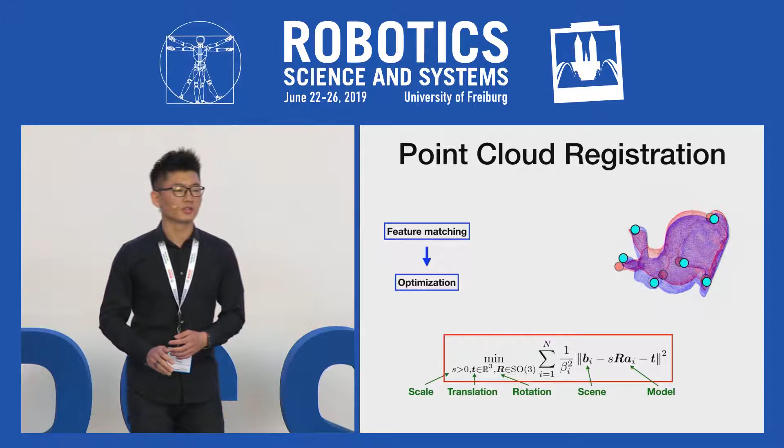However, in practice, many of the feature correspondences are actually wrong. Therefore, it is popular to apply RANSAC and M-estimation to deal with outliers. But as shown by these two videos, both RANSAC and M-estimation can easily get stuck in local minima in the regime of high noise and high outlier ratios.

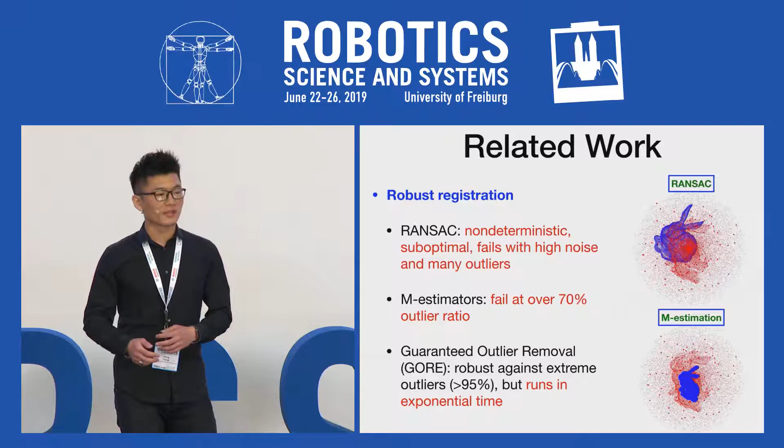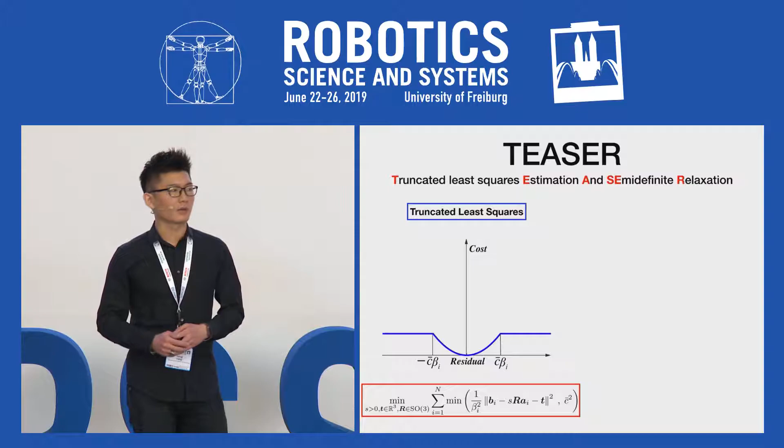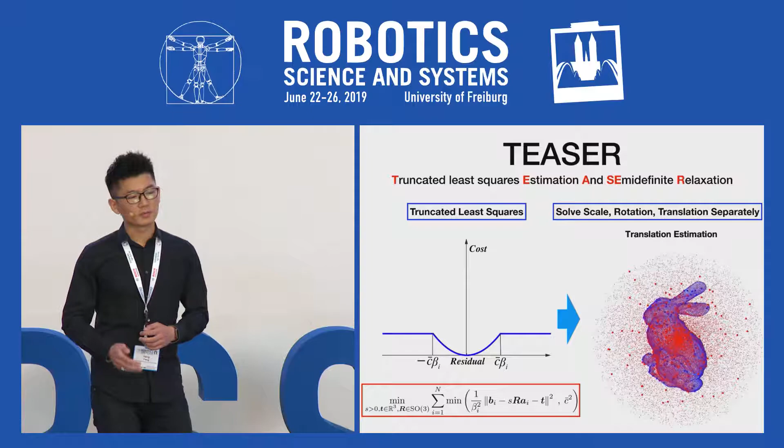Our method, TEASER, uses a truncated least squares cost function so that the outliers have no effect on the optimization. Solving this optimization, however, is extremely hard. Therefore, our key contribution is to decouple the estimation of scale, rotation, and translation, and to develop polynomial time algorithms for each problem. In order to decouple the estimation, we propose to build invariant measurements.

The first insight is that the relative distance between any two points is invariant to translation and rotation, and only depends on the scale. The second insight is that the relative positions are actually invariant to translation.

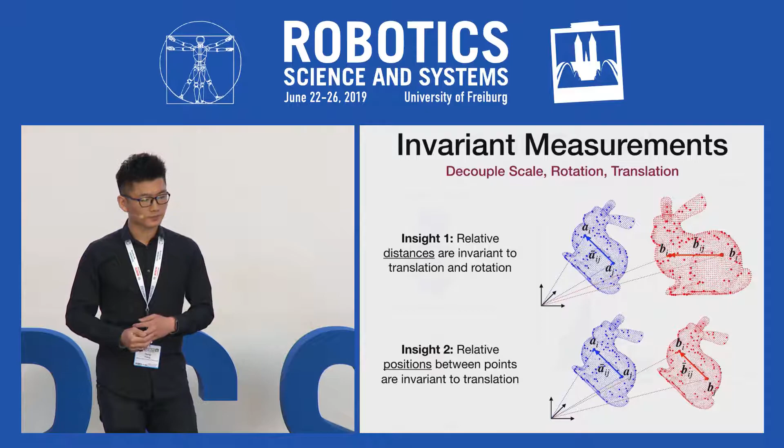Using invariant measurements, our first step is to estimate the scale using adaptive voting. The intuition behind adaptive voting is very much like plotting a histogram. We can break the range of measurement value into many bins, and then count the number of measurements inside each bin. The bin that has the highest voting will contain the estimated scale. Luckily, adaptive voting is guaranteed to return the optimal solution.

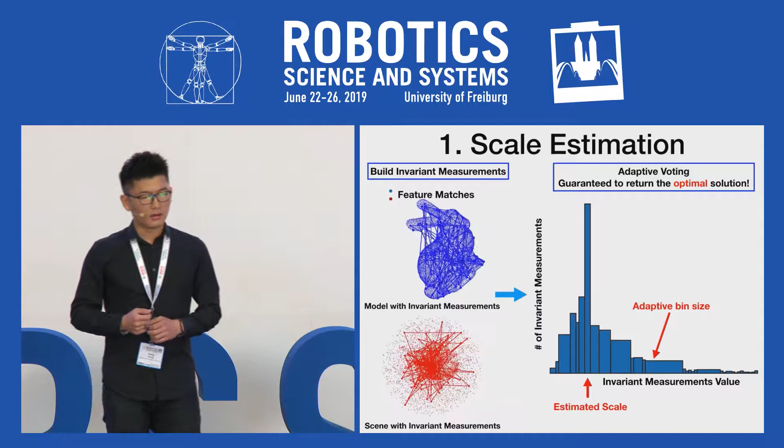Our second step is to estimate the rotation using a semi-definite relaxation. The magic behind SDP relaxation is to lift the decision variables into a higher dimensional space so that the original non-convex problem becomes convex, in which case we can guarantee to find the global minimum. Empirically, our SDP relaxation is exact or tight, even with extreme outlier rates.

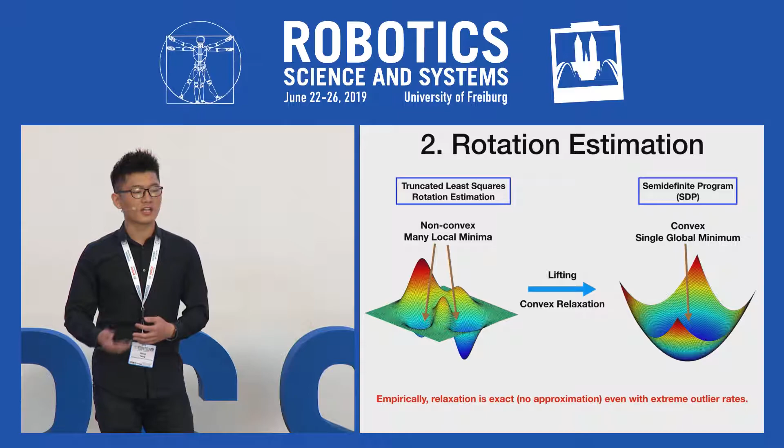Our last step is to estimate the translation using component-wise adaptive voting. In this step, we treat the X, Y, Z components of translation separately and apply adaptive voting three times to get the optimal estimation in each direction.

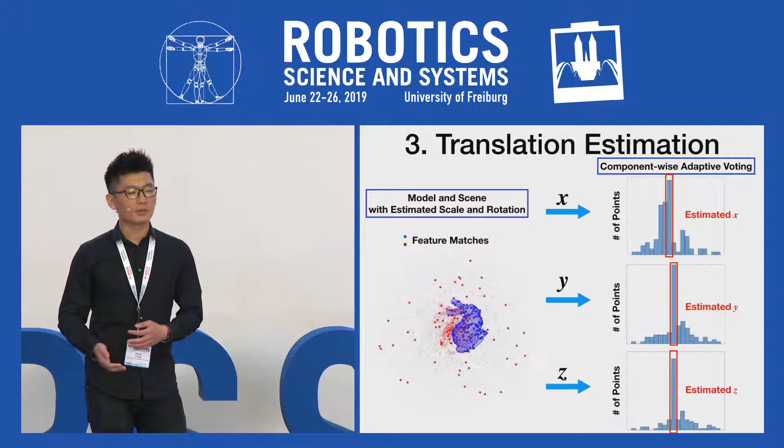We tested TEASER against several state-of-the-art methods in simulation. This plot shows the rotation error in degrees with increasing outlier rates from 95% all the way up to 99%. As we can see, both RANSAC and M-estimation fail very badly in this situation. Our method, TEASER, shown in blue, is robust against 99% outlier rates and returns the most accurate solutions. The second best approach, GORE, although being similarly robust, is actually an exponential time algorithm based on branch and bound.

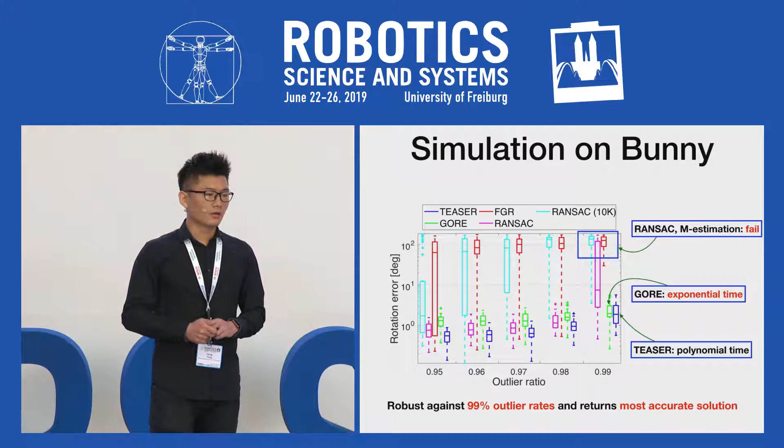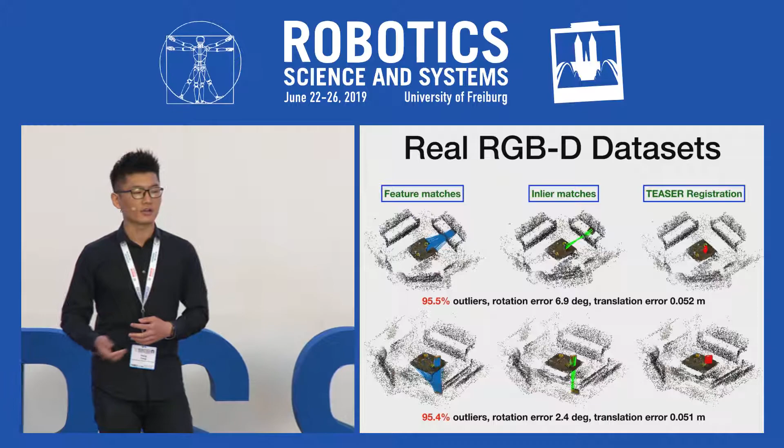We also tested TEASER on real-world RGBD datasets for object pose estimation, as can be seen by these two examples. Even when there are more than 95% outliers in the feature correspondences, TEASER is able to find the inliers and estimate the pose with very high accuracy. With that, I want to thank you for your attention and invite you to come to our poster for more discussion. Thank you.

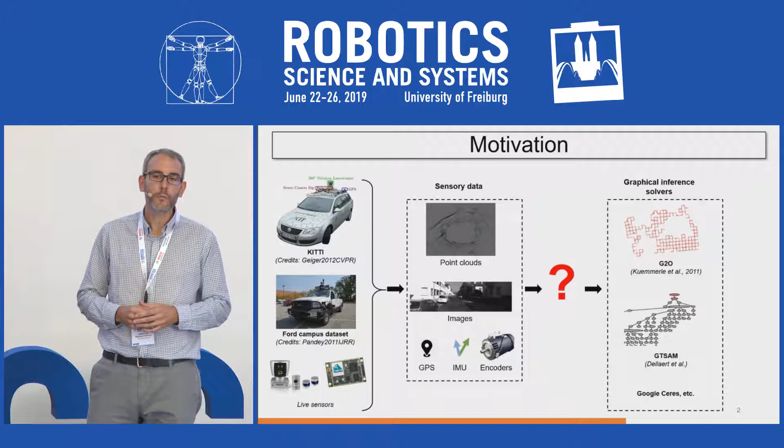Hi everyone, I'm presenting a localization and mapping framework. The main motivation behind this work is basically a frustration trying to put together different kinds of front ends for different kinds of sensors. Nowadays, it is really difficult to put several of these works together.

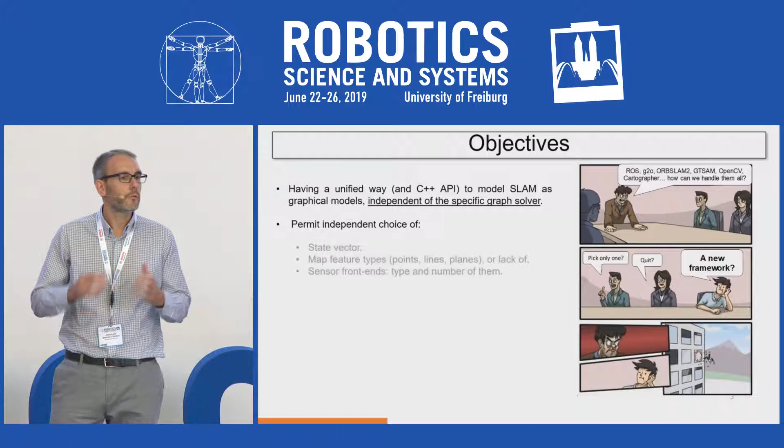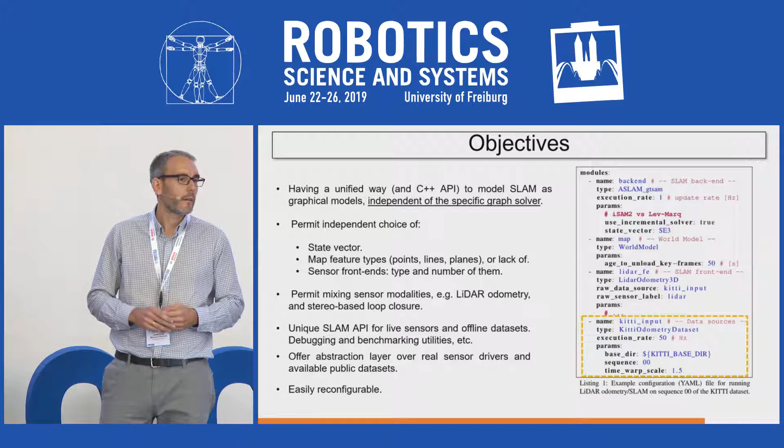Ideally, a SLAM framework should be something flexible that allows you to switch between 2D or 3D mapping, mixing different kinds of sensors. Our framework tries to do that. By changing a few lines in a configuration file, you should be able to switch between reading from an offline dataset or reading from a real-time sensor like a Velodyne LiDAR.

Let me introduce an overview of the architecture of the system. We start with a system loader, which is in charge of rising up the rest of the modules in the system. We have blocks that work as sensor inputs, which may read from a real sensor or a dataset. Then we have that information fed into the different front ends for different kinds of sensors, like vision or LiDAR. And then we have a unified interface to the SLAM backend, which inside has the graph solver.

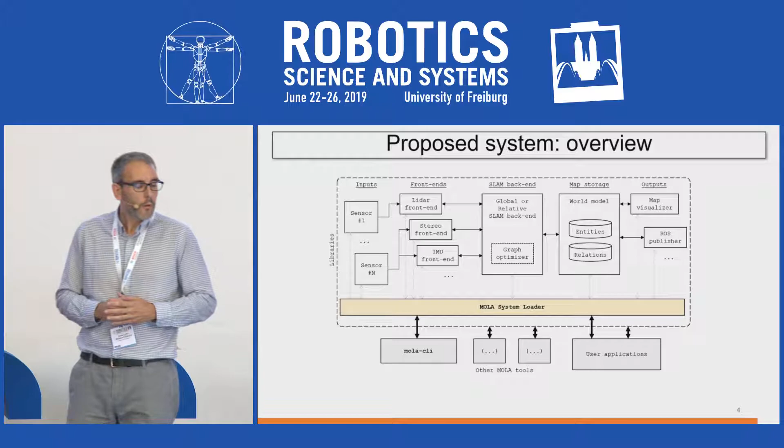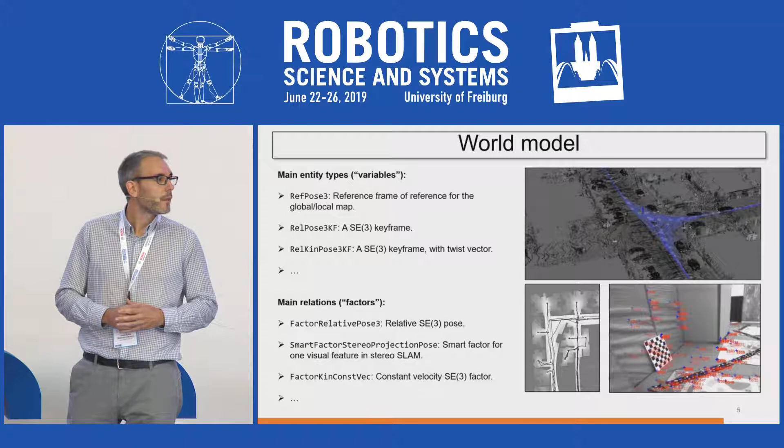This SLAM backend is talking to the world model. The world model is basically a graph where the nodes may be some stuff like keyframes, or they may be the relative position for the calibration of cameras, for example. We also have relationships between the different entities. Basically, you can think of that like factors in a factor graph.

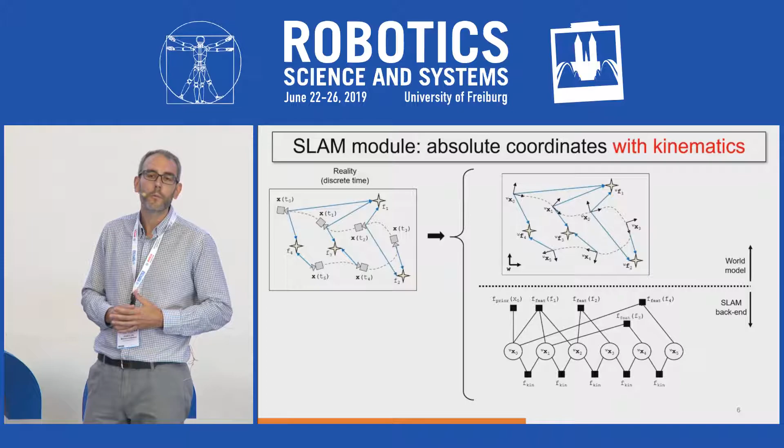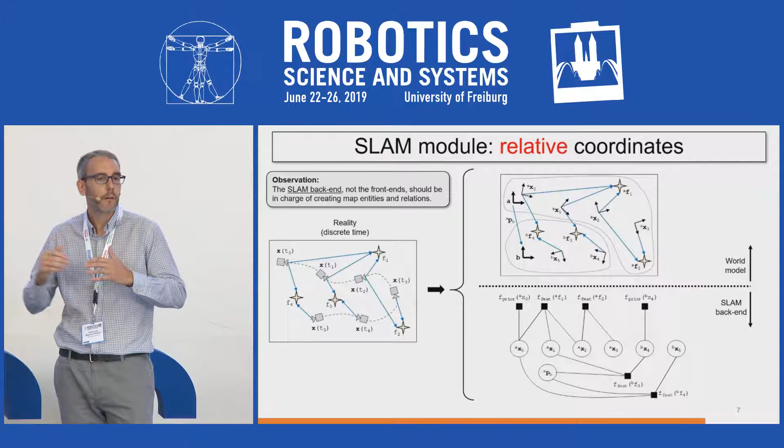In this slide, I show how a real-world trajectory from a robot or a camera is mapped into some structure in the world model on the top, and then the corresponding factor graph on the bottom. In this particular case, using kinematic constraints for a constant velocity model. By switching the kind of map, you can get a totally different representation. For example, here we have relative coordinates using sub mapping. The front end knows nothing about this decision, so everything lies inside the SLAM backend.

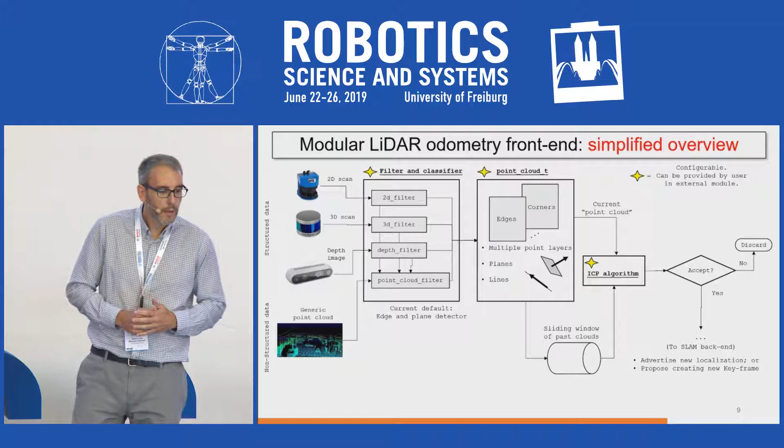Let me present now the LiDAR pipeline that we are offering in this paper. Basically, we have a pipeline with a filter, then a data structure for multi-feature, multi-layer point clouds, and then a set of different ICP algorithms. Every single part of this pipeline can be extended by the user, so you can focus on doing research on a new ICP algorithm or a new detector, and then benchmark the result against alternative configurations.

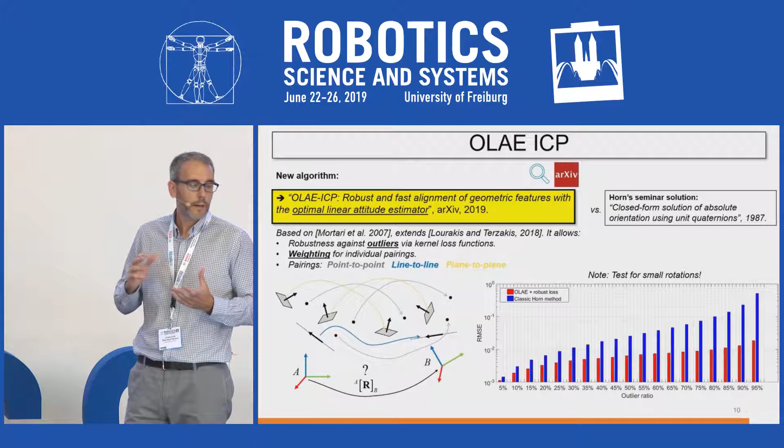In particular, the ICP algorithm that we have introduced here is a modification of the Horn solution that is able to handle point-to-point, lines, and planes correspondences. You can check out the supplementary paper for that.

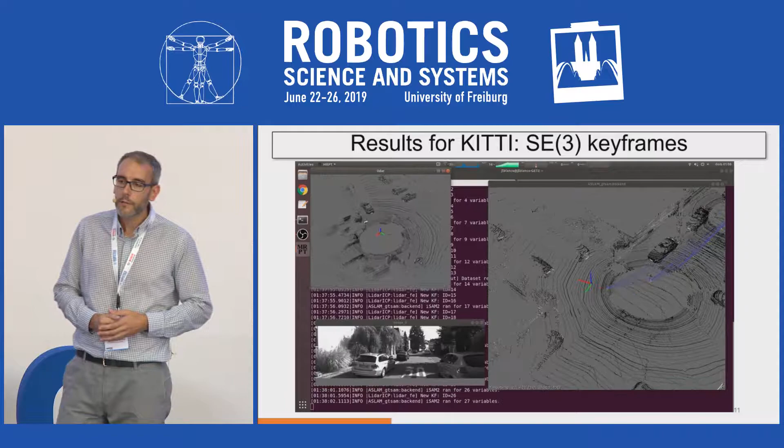Here you are watching a live demonstration of the system, which is running a 3D graph SLAM problem using the LiDAR sensor from the KITTI dataset. On the left, you have the raw input to the system. On the right, the map that is being built online, including loop closures and everything.

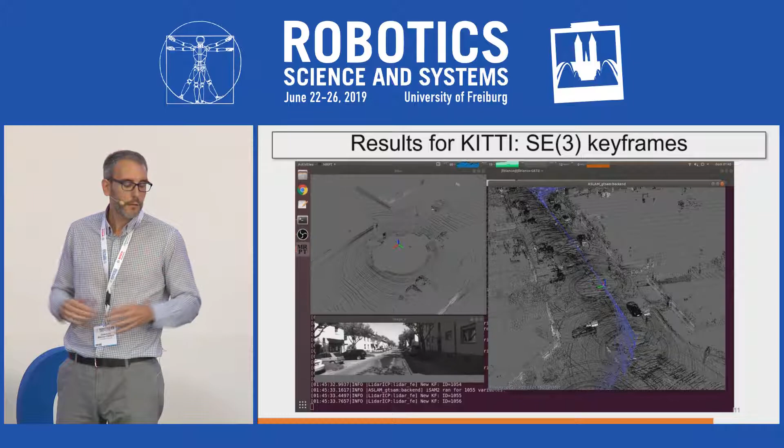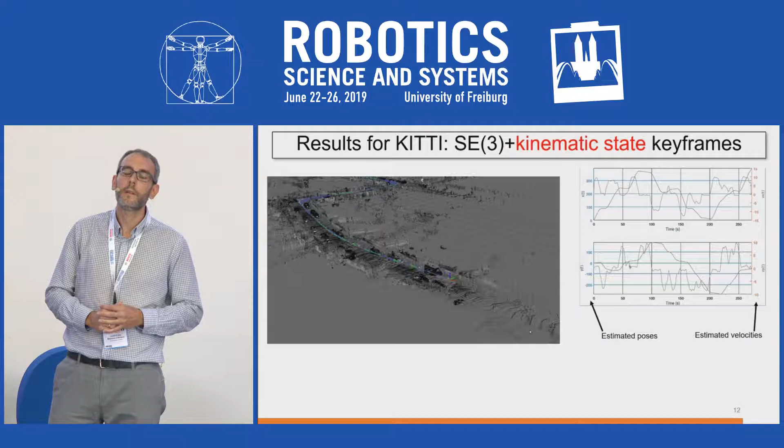It runs about twice real time, but there is room for improvement in every single part of the framework right now. By changing one parameter of the system, you include, for example in this case, the velocity of the vehicle into the system—these small green arrows that are being displayed there are the velocity being estimated online by the backend.

So basically, we already have a system that is usable, but there is a huge amount of future extension to this framework, and I invite you all to give it a try. It is open source on GitHub. So thank you.

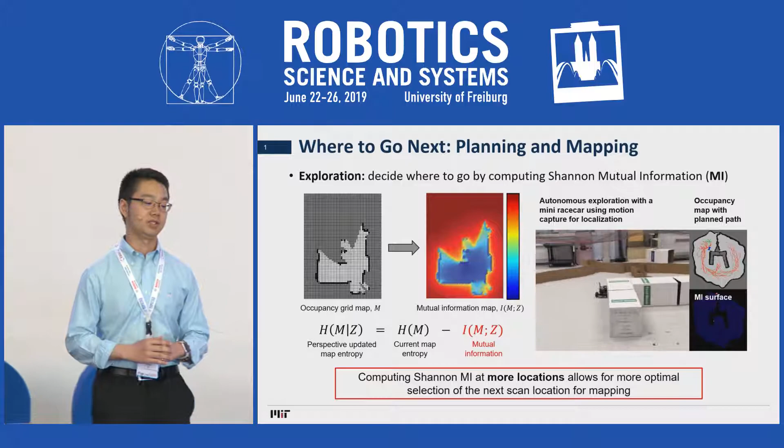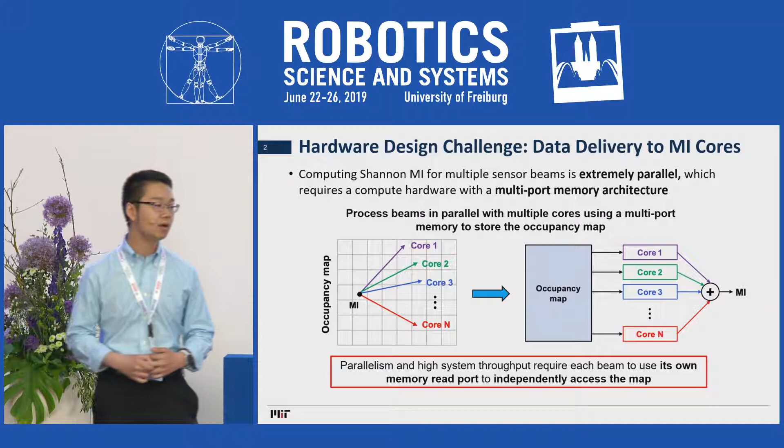However, standard energy efficient memory only contains a maximum of 2 read ports, which severely limits the number of cores that can be active at any given time. Thus, we decide to partition the storage of the map into multiple memory banks to provide more read ports for the cores to use and increase the memory bandwidth as a result.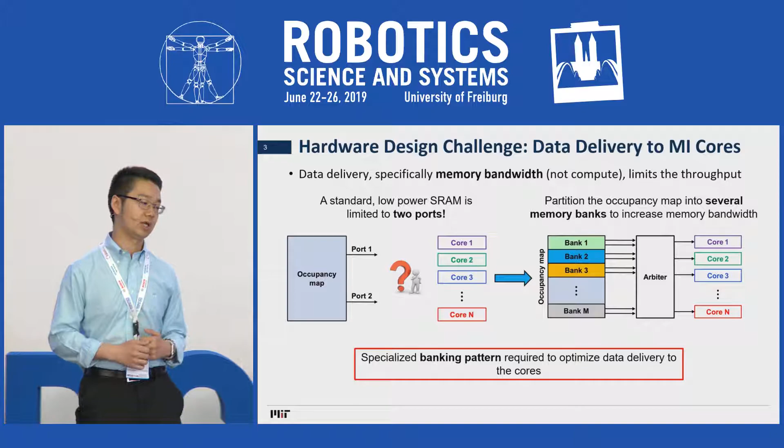To find the optimal banking pattern, we know that all the cores access the same row or the same column of the occupancy grid map every cycle, as shown on the left figure. Since each bank only contains 2 ports, our strategy is to let the cores access different banks every cycle to avoid multiple cores fighting over the same ports from the same bank. Thus, by diagonally partitioning the storage of the occupancy grid map, shown on the right, we're able to maximize the data delivered bandwidth to all the cores because no more than 2 cells from the same bank occur in each row or column of the map.

For our final design, we diagonally partition the storage of the entire map into 16 dual-port memory banks, which provides enough bandwidth for 16 cores.

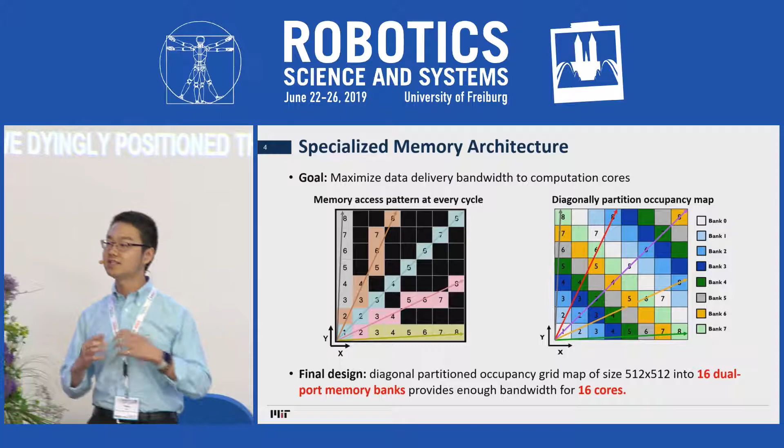We tested our entire system on a Xilinx FPGA, and we plotted the system throughput versus number of cores. If the memory has infinite number of read ports, we expect the system throughput to increase linearly with number of cores, which is shown with a dotted black line. On the other hand, if we were to store the entire map in a single dual-port memory bank, our system throughput will be heavily memory bandwidth limited, which is shown with a blue line.

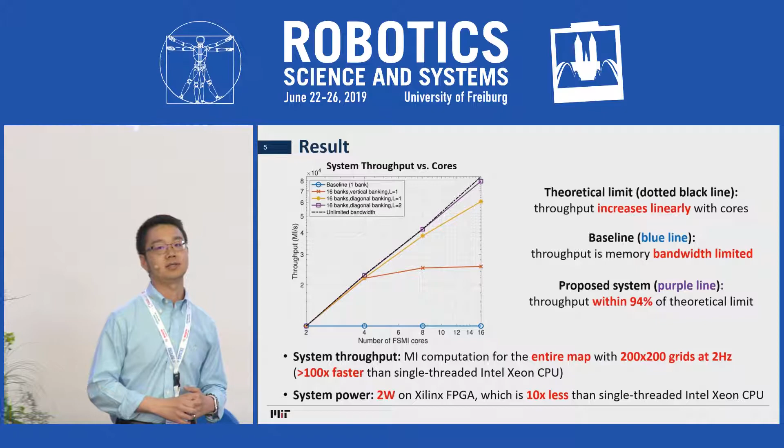By using our diagonal memory banking architecture, our throughput falls within 94% of the theoretical limit, which is shown with a purple line. In all, our entire hardware system computes MI for the entire map at 2 Hz, which is more than 100x faster than a similar computation on an Intel Xeon CPU, while only consuming 2 watts, which is 10x less than the same CPU.

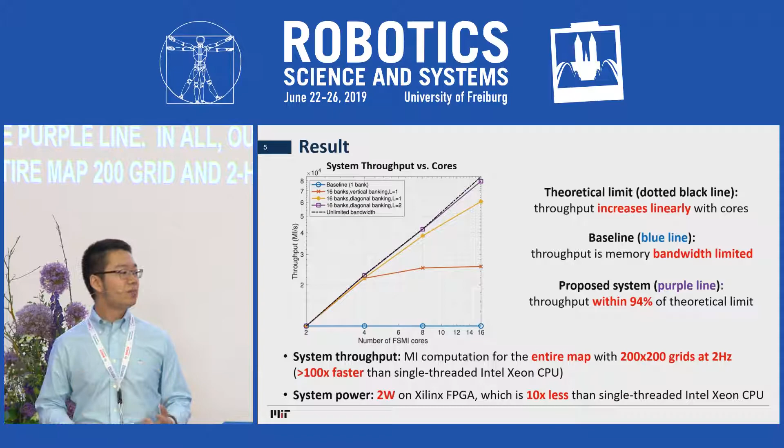In summary, we found that having a parallel algorithm is not a sufficient condition for high throughput computation on specialized hardware. In fact, we argue that the hardware is often limited by its memory architecture and the data delivery method to all the cores. By using a diagonal memory banking architecture, our hardware computes MI for the entire map in near real time with very low power.

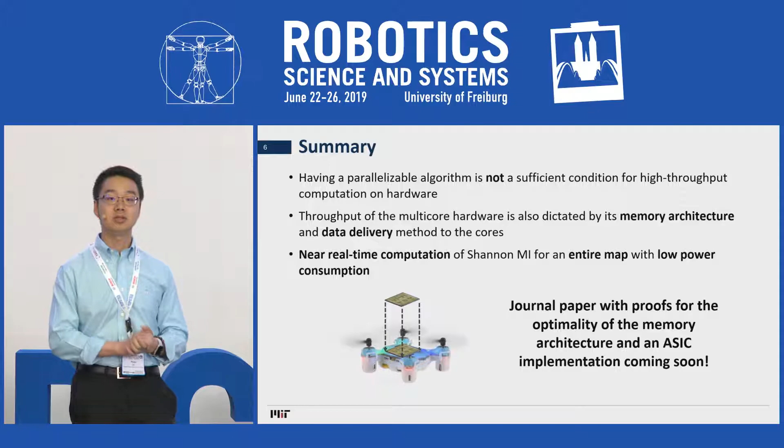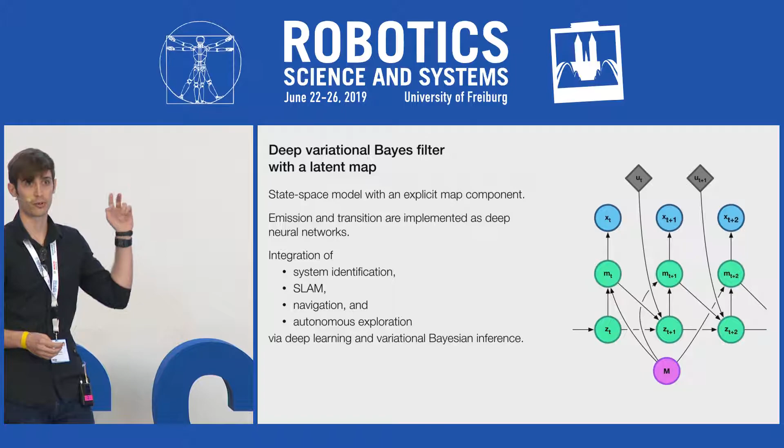To this end, we propose our deep variational Bayes filter with a latent map component, which you see as a probabilistic graphical model on the right. This model has a learnable transition and a learnable emission model, parameterized through neural networks. We're hopeful that with this model we can tackle tasks such as system identification, SLAM, navigation, and autonomous exploration in a unified framework. Z's represent agent poses, U's are controls, X's are observations, and M is our map.

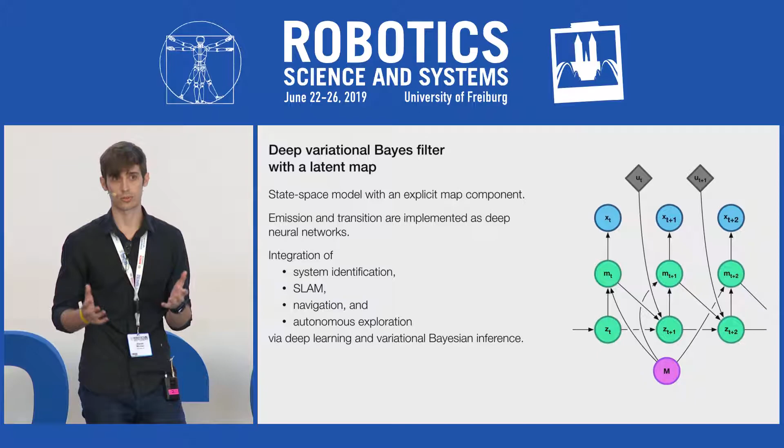Now, in the rest of this talk, I'm just going to illustrate how we approach the different spatial tasks. So we start out with simultaneous localization and mapping. In our deep probabilistic model, this comes down to obtaining posteriors over the agent poses and over the map variable, which are done with black box variational inference with a traditional ELBO that's very typical for generative models.

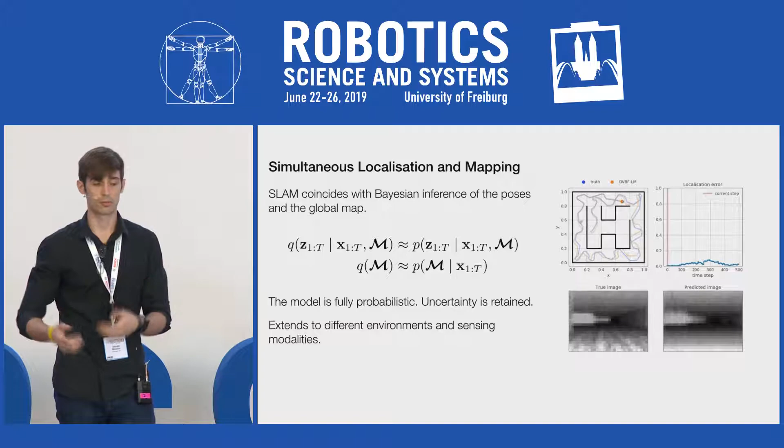On the bottom right, you can see some emissions from the learned map as the training process progresses. And the model is fully probabilistic, so we retain all uncertainty about every single component. Now, one major thing that I want to illustrate here is that we can switch modalities by just changing the emission model. So the system is modular, which comes from the fact that it's a state space model, so you can easily exchange the learned components for something else to model different modalities.

The next task that we consider is navigation, and for this we apply our model to a new environment that hasn't been seen before, learn a map for it, and then use the model as a simulator for the world to completely do planning in it. And here we illustrate that with A* search, for example, we can still achieve a 100% success rate of navigation from one pose to the other. And of course, any other reinforcement learning or optimal control policies can be used to construct plans in our model that just acts as a substitute for the real world because it's a generative model.

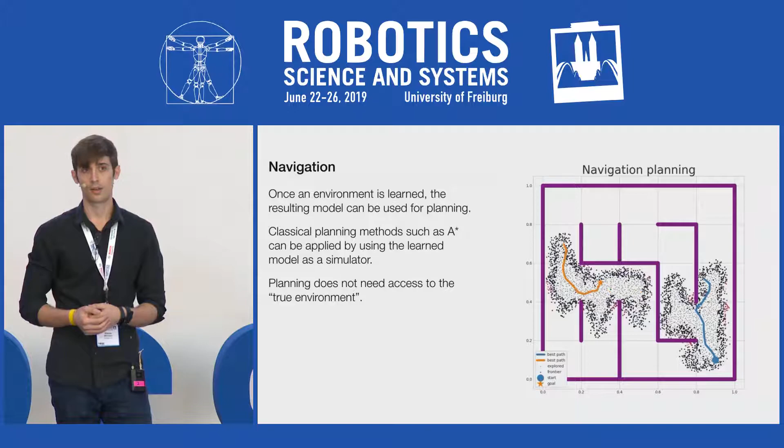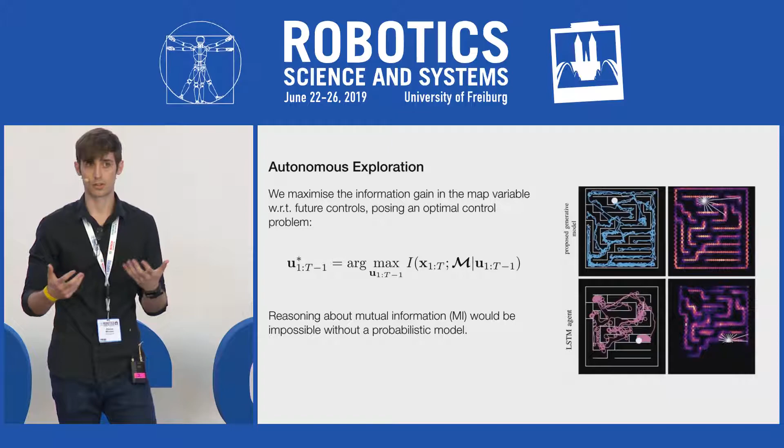The final task that I want to illustrate now is exploration, and that's how to explore a new unseen environment efficiently. And we have a fully probabilistic model, which means that we can utilize information gain and devise the whole scheme with information theory to maximize the information gained about the random variable of the map. So this comes down to just doing an optimal control task for maximizing the mutual information between future predicted observations and the map variable. And as you can see, our model significantly outperforms a deterministic baseline, which is an LSTM network, which does not have the probabilistic assumptions and structural inductive biases that we impose on our model.

So throughout all of this, we had to face two major challenges. The first one was that we need to model very long trajectories, and standard backpropagation through time for learning does not really scale. So we had to introduce a new approximate particle scheme for our posterior, which makes it possible to use GPUs and do mini-batching. The second major challenge is that of perceptual aliasing, which is very, very typical for spatial environments. It leads to multimodal posteriors over the poses, and this we tackle with a particle filtering variational family for our approximate posterior.

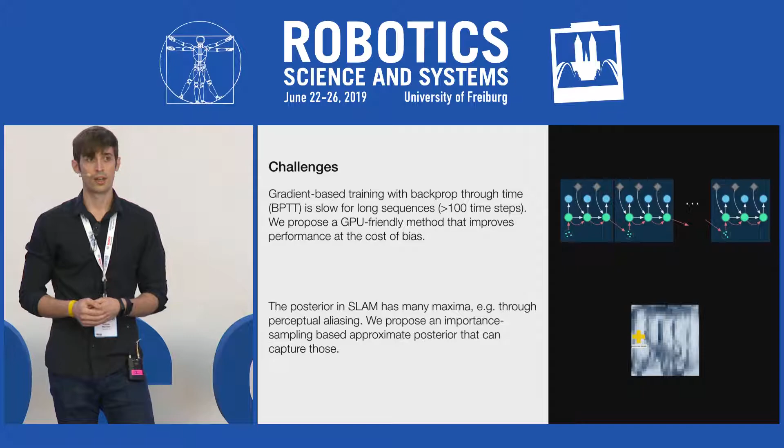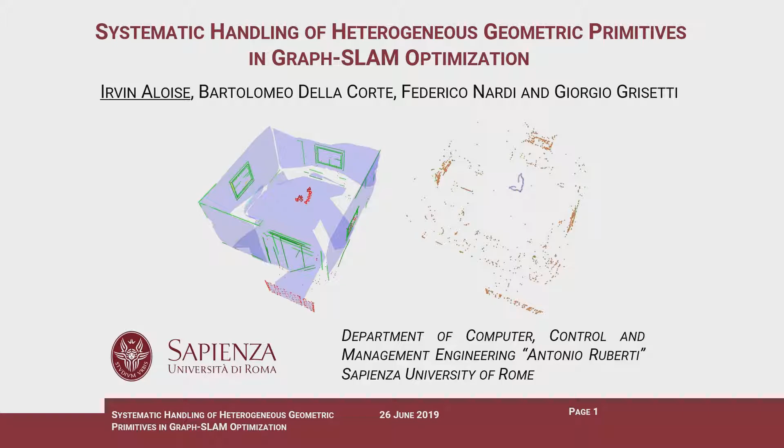So the final presentation will be on systematic handling of heterogeneous geometric primitives in GraphSLAM optimization. And the talk will be given by Irvin Aloise. Okay, hello everyone. I'm Irvin Aloise, and I'm going to present a work that we developed in our lab at Sapienza University of Rome. That is called Systematic Handling of Heterogeneous Geometric Primitives in GraphSLAM Optimization.

So a bit of background, we are in GraphSLAM, and we want to perform global optimization, so we want to optimize both the trajectory of the robot and the position of landmarks. So we have different kinds of landmarks that can be used in this context, from lower dimensional geometric primitives like points to other primitives like lines, planes, and so on. The use of higher dimensional primitives actually brings several benefits to the system because it better represents the environment and also, in general, enhances the convergence of the system. However, dealing with these objects in an ad hoc manner may result in a system that is less compact.

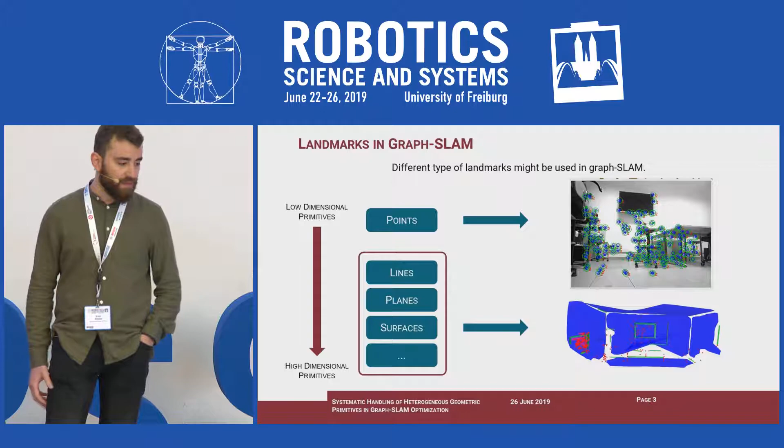So what we propose here is actually a novel formulation that is able to represent these primitives like points, lines, and planes as a unique object that is called matchable. So a matchable is actually a degenerate quadric, and so we represent each of these objects, for example, a point as a degenerate sphere, a line as a degenerate cylinder, and a plane as two planes with null distance.

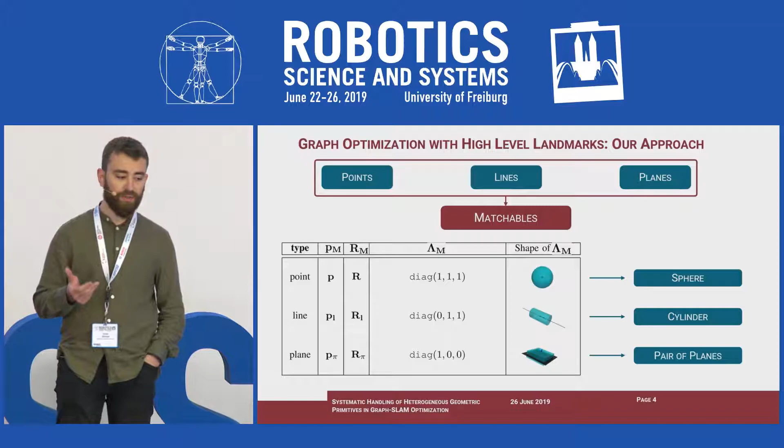So using this formulation in our problem, we are able to actually combine the benefits of having higher dimensional primitives, as I said before, so the better description of the environment and the potential reduction of the memory footprint of the map, together with a compact implementation, so an easy to implement system, and most importantly, the ability to generate heterogeneous observations of the landmark. For example, if we have a landmark that is a plane, we can actually sense it, so observe it as a line or as a point, and so on for also the other primitives.

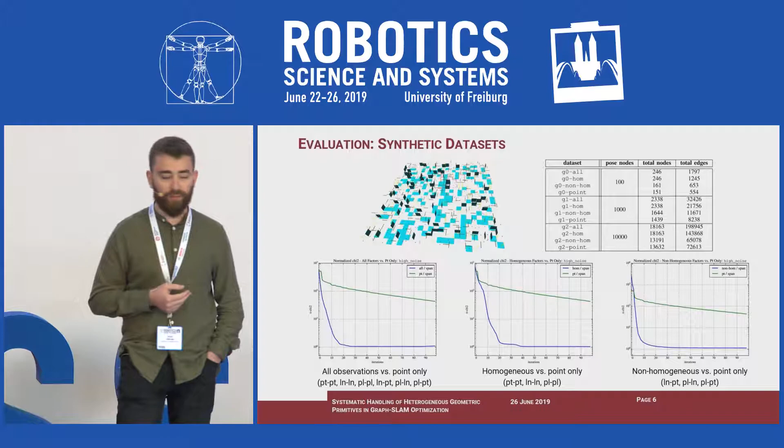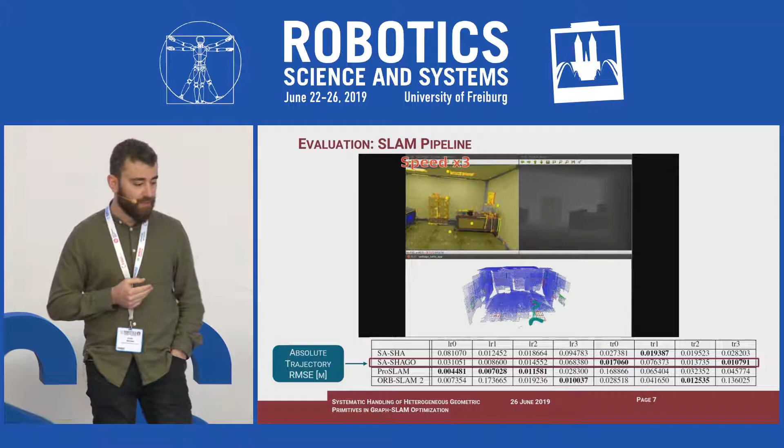Finally, we also embedded this formulation in a full SLAM pipeline, where we process RGBD data to construct a graph. And we then perform a global optimization, both on the poses, on the trajectory and the landmarks, and we evaluate the absolute trajectory root mean square error. As we can see from this table, despite the simplicity of the front end that has a great impact, we are able to achieve results that are comparable with other state-of-the-art RGBD systems.

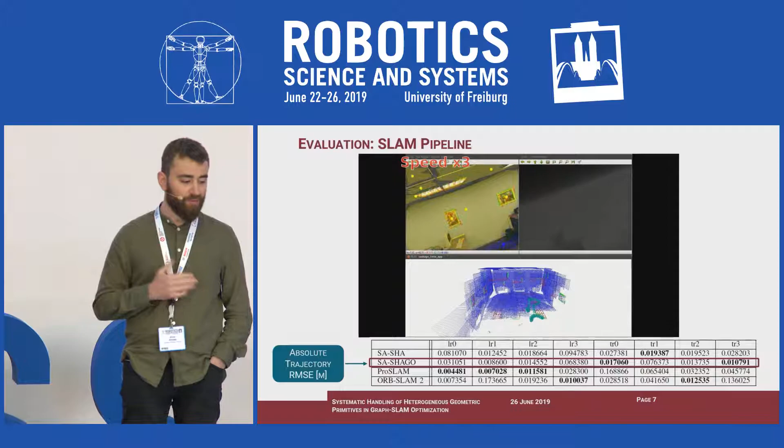So that was all. And if you're interested and you want to know more about it, just have a look at the paper downstairs. Okay, thank you.

Thank you. So I would ask all the speakers to join me on the podium. Thank you. So any questions for the speakers?

Hello, I had a question for the first talk. Thanks for the interesting ideas. I guess the assumption is that the outliers are kind of random. So do you think that can be expanded to several identical parts in the same cloud? What's the last sentence you said? Do you think that can be expanded to the case where you have several of the objects in your point cloud?

Oh, yes. So right now the assumption on the outlier is that it's randomly generated. But we do have another paper, actually not on arXiv yet, that will show that when you have multiple objects, this SDP relaxation will give you a rank 2 solution, which corresponds to the 2 objects in the scene. So that's quite interesting. Thanks.